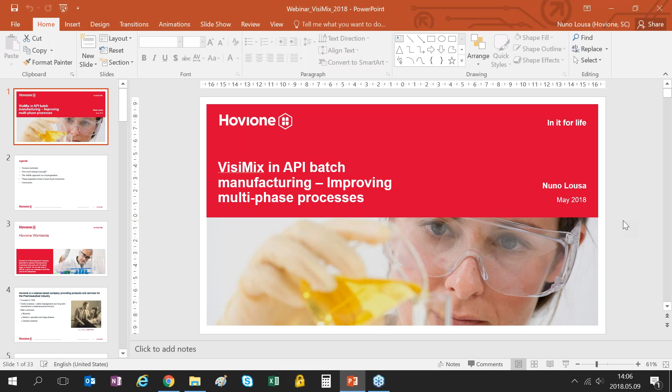So let's go over the agenda for this presentation. I will start off by speaking a bit about Hovione - who are we, for those who don't know us. I will also discuss briefly the importance of mixing simulations in our business, namely its importance due to the subjective nature of mixing. Then the peak of the presentation will be a couple of case studies regarding a hydrogenation reaction and the optimization of a liquid-liquid extraction. And I will end with a few conclusions regarding the benefits of using this mixing simulation tool.

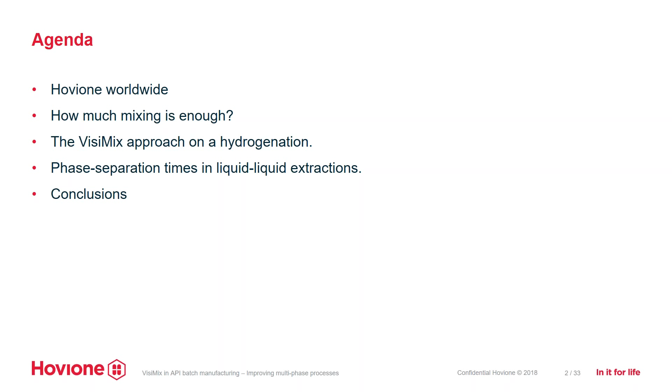So Hovione, who are we? We are a pharmaceutical company dedicated to helping pharmaceutical customers bring new and off-patent drugs to market. We usually say that we achieve the impossible. We can do what is difficult, and we give our customers what they cannot find elsewhere.

So our history began almost 60 years ago. This is our founder, Ivan Villax. We are a family business, which enables us to have stable management and long-term commitment to our customers, which are mainly biotechs, medium specialty and large pharma, but also some generic pharmaceutical companies as well.

The past has been very good for us, but the future is expected to be even brighter. We started off by developing several patents in corticosteroids and semi-synthetic tetracyclines in the 60s and 70s. Later, in the 90s, we started having particle engineering capabilities, which make us now one of the top players in the world regarding spray drying and other particle engineering technologies.

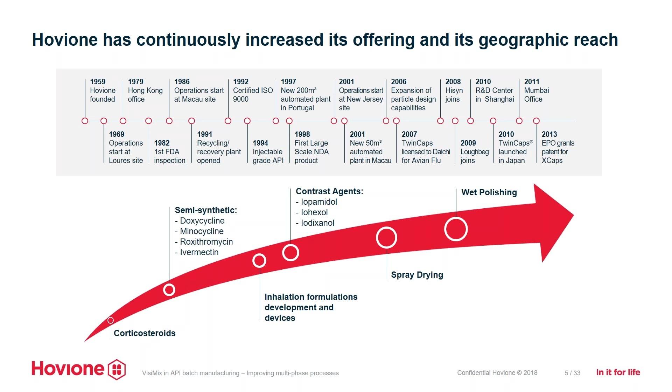We are based almost worldwide. We have a very nice site, and the most important one is in Loures, Portugal, where I'm broadcasting this presentation. We have a state-of-the-art R&D center in Lisbon, and our plant in Loures. But also in the United States, we have very nice pilot plant facilities and research and development labs. We have in Cork huge manufacturing capabilities, which were acquired from Pfizer almost 10 years ago, but also a very important production unit in Macau, China.

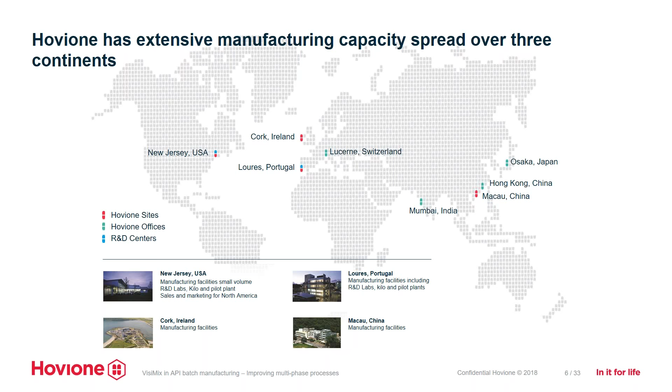So let's begin. Why do I think about mixing? When do we consider that mixing is enough? This is a very interesting question because, as you'll be able to see, many times we are asked to quantify mixing and to determine scale-up factors, by our customers, but also by my chemist colleagues and my colleagues from engineering and manufacturing.

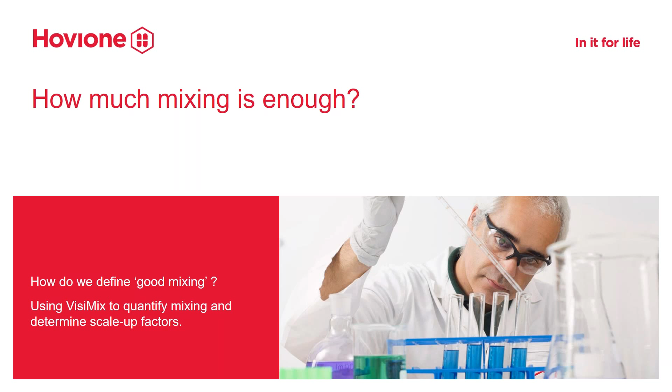Some of the questions I came across - I once was in a teleconference where a customer asked for efficient mixing at this stage, but we didn't have any indication of what could be good mixing, because we didn't know what reactor we were going to use, or the impeller type, or even simple RPMs in the lab. We had no idea. But he mentioned that it would be important. So this tool allows us to quantify this sort of efficient mixing, which is very important.

Also, mixing issues when we perform scale-up can destroy a batch - whether it's impurity increase, different crystal polymorphs, or even excessive time during operations - all of this can cost a lot of money. So I strongly advise people to invest in this type of study.

I also get very funny questions from my colleagues at the chemistry department, like, can we avoid wall splashing? This is very important when you're dealing with crystallization by distillation, for example, where you can get the product stuck in the reactor walls. In the lab this is not very hazardous, because it's a very small amount of product, and you can actually see it becoming stuck and try to make it go back to the liquid. But at manufacturing scale, this can be a real problem. So this type of simulation also helps us understand if this can happen.

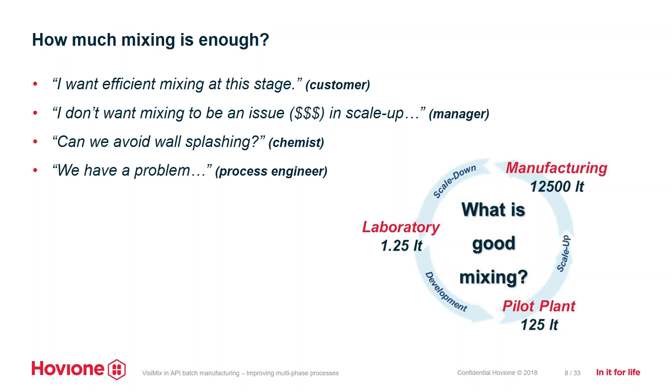In this slide I'm presenting a very basic explanation of how I usually evaluate the mixing properties in a vessel. I think I have the...

Dalia, where can I get the pointer? Okay, no, sorry.

What I do is start off by evaluating, using the VisiMix software, to calculate mixing parameters and mixing properties such as blending time, micromixing, mesomixing, hydrodynamics, flow speed and direction - very important as well - but also energy dissipation. In case of multi-phase dispersions, we also have solids suspension, droplet sizes, and specific area for mass transfer. So very useful parameters that you can then try to modulate by changing your stirring speed or your batch size.

This includes batch size at manufacturing. Sometimes I can actually tell the process engineer that it's better to do two batches instead of one, if I found that the mixing parameter can have a great influence on the process.

Also, by changing the impeller or the baffle type, we can also try to force the process to have the parameters that we know are important. I've also come across situations where I had to select specific reagent inlet positions, for instance in areas of maximum energy dissipation, in order to maximize the mass transfer for the process.

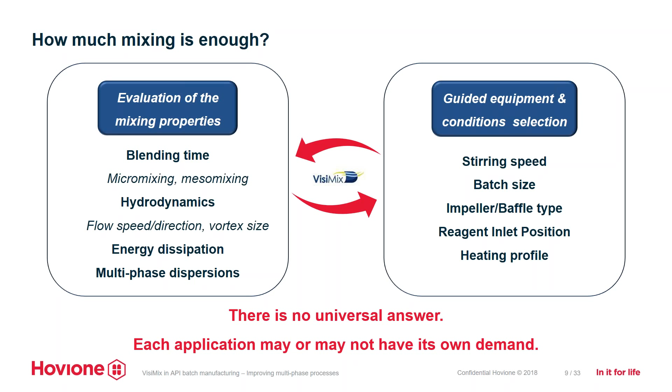Okay, so there's just a small glimpse here. There's no universal answer for how much mixing is enough. You always need to study your process in the lab, or at least gather some observations at manufacturing, so that you're able to scale down the process and perform troubleshooting. I usually do this in the lab because it's less expensive. Anyway, each application may or may not have its own mixing demand.

Which is very nice as well - it helps us a lot in getting the right-first-time approach. Between Hovione sites, I've come across problems in emulsion formation, crystallizations, and heat transfer, as I was saying. I've also had the opportunity to study hydrogenations, which you will see today.

And of course the mechanical design, because when we want a new impeller, we actually ask the suppliers for specific characteristics of that impeller. We don't ask the supplier to help us choose the best impeller - we do pretty much the opposite. We present the supplier with the impeller we want.

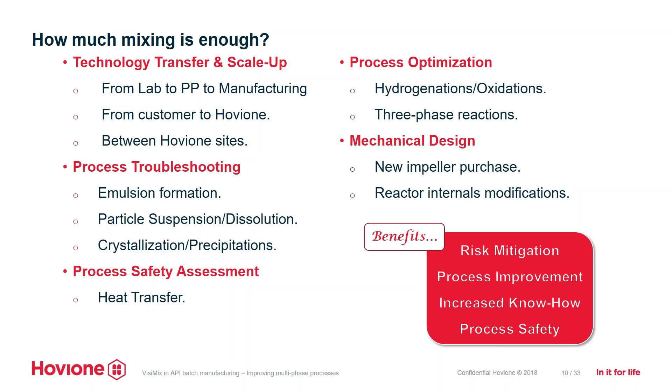All in all, this provides very nice benefits, such as risk mitigation for batch failure - this is the main benefit I get from using the software - but also process improvement, increased know-how, because you'll understand your processes better, and of course, as I said before, process safety.

We will then see a case study regarding hydrogenation and a case study regarding liquid-liquid extraction. As for the hydrogenation, the goal here was to perform a tech transfer, which turned out to be a success. But during that tech transfer, I came across several observations which enabled me to optimize our process by improving the impurity profile and cycle time.

Okay, so let me show you how it all happened. This started off by the need to increase production throughput, and so we had to replicate a process that was going on in our site. It usually used a 3,000 liter hydrogenator, and now we also had to use a 6,000 liter hydrogenator.

This happened a long time ago, and no one really knows how the new stirring speed, the 164 RPM, was selected, because we asked the manufacturer of this reactor to design the impeller in order to replicate the mixing conditions observed in the first reactor, at the first site.

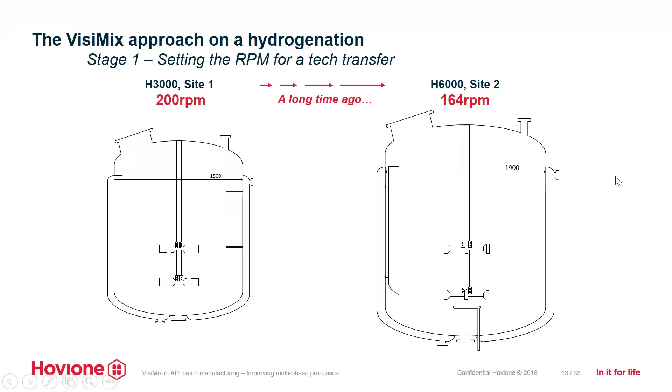The fact was that the process went on very smoothly, and now I had the challenge to transfer again this process, but this time it was for a 5,000 liter hydrogenator.

The hydrogenator had several particularities, namely the three-stage impeller system, whereas the previous two hydrogenators only had two impeller stages, and it also had a higher height to diameter ratio, so it was like a cigar, as we usually call it. Anyway, so how did I approach this issue?

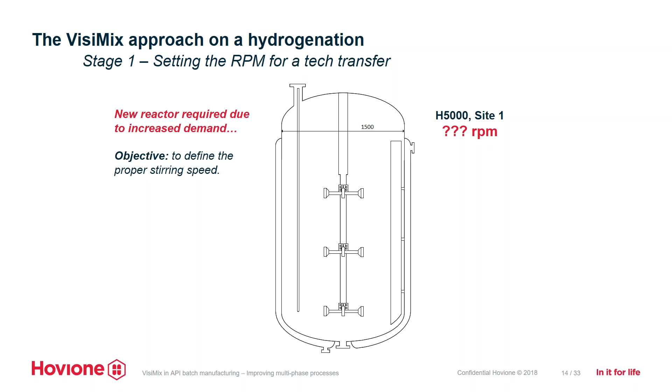I started off by simulating both reactors, the initial ones, the 3,000 liter and the 6,000 liter hydrogenator, and I found that they had exactly the same maximum energy dissipation profile. So it was pretty clear to me, pretty obvious, that the manufacturer also used this approach in order to simulate the mixing conditions that would return the process output.

The fact is that the reaction output in both of these reactors was very similar, so in terms of reaction time and impurity profile, everything was very, very alike. So I concluded that probably we would also use this approach in order to select the adequate RPMs in the 5,000 liter reactor.

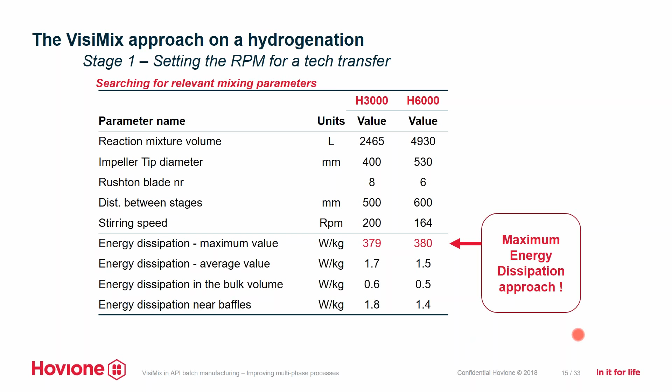In fact, when we used these new RPMs, which were 158 for the new hydrogenator, the performance of the process was outstanding. It actually cut the reaction time almost to half, and we obtained the lowest values of impurities ever.

After discussing these observations with our process chemists, we quickly understood that this was due to a faster reaction, because one of the impurities was correlated with long reaction times. So it was pretty obvious that the increase in mass transfer was taking place. But since we were mimicking the exact same energy dissipation conditions, something was missing from here.

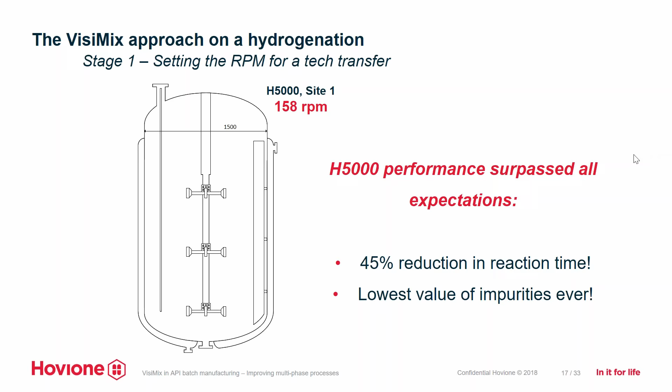So I went on to the software again. I did some more simulations, but this time I evaluated the gas-liquid parameters. As you can see, in the previous reactors, they were all about the same order of magnitude, namely the estimated surface aeration rate, and for instance, this one I like very much, the specific mass transfer area. So they're pretty much the same order of magnitude, okay?

But when we move to the new reactor, we jumped one order of magnitude. So in fact, the new hydrogenator, the 5,000 liter hydrogenator, had a much higher ability to improve the mass transfer for this process, which will explain why we are observing such a fast reaction and low impurity profiles.

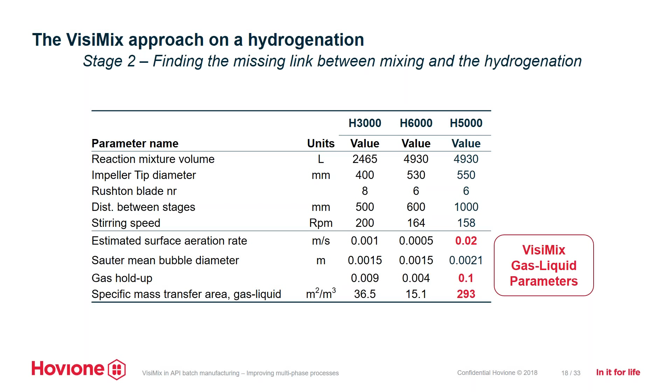So the question was now, can I do this for the other reactors? Can I try to improve this process in the other hydrogenators? I had to back up a bit on this. I had to find a rationale for this, because I was about to suggest changes to a process that was already validated and approved by the FDA and so on.

So you can find a lot of references in the literature that correlate a high KLA, a mass transfer coefficient, with hydrogenation reactions. So it was pretty easy.

But also the VisiMix allows us to check, to visualize the flow pattern inside the hydrogenator. And what you can see here is a clear compartmentalization caused by the 3 different impeller stages. So this type of impeller, a Rushton turbine, can create, when used in more than one stage, this type of compartmentalization effect.

And if you insert the hydrogen from the bottom, this will take longer time to leave the reactor, because the flow is actually pushing it down, thus fighting a bit its buoyancy. Okay, you can also find a lot of reports such as this one in the literature.

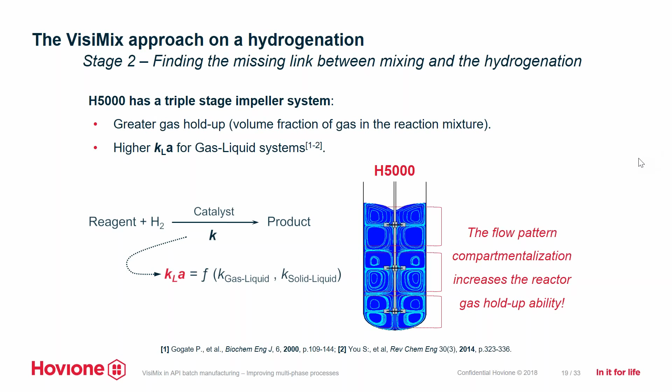So I thought this could be a nice approach, and I did a lot of simulations in the 6,000 liter hydrogenator, the one that actually was used very often. I did a lot of simulations. You can only see one, just by adding an extra impeller stage.

Although our energy dissipation profile, the maximum energy dissipation profile, would be slightly lower than the previous reactor, the gas-liquid properties would increase one order of magnitude, which was actually what happened in the 5,000 liter reactor, which yielded a very nice reaction. So, a very simple way to optimize the process, just by inserting a new impeller stage.

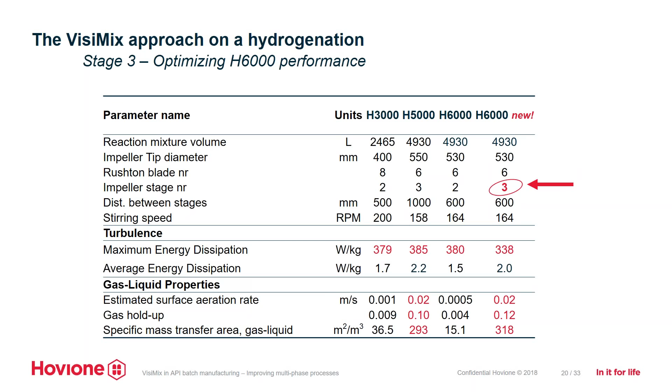But this had some engineering concerns, of course, but the software also allows us to do this type of simulations. You can actually check what would be the impact on the stability of your shaft and on the power output that it will now take from your engine, your motor.

And what you can see is that, I remember the motor had something like 22 kilowatts of power, so we were way below - we had enough power to accommodate the new impeller stage.

We are also very happy with the critical frequency. This is very important, especially in hydrogenators. For those of you with experience on this, we cannot have vibrations in the shaft, otherwise we can compromise and have leaks in our hydrogenator, which we don't want for safety reasons, of course.

Anyway, I used these values and presented them to our engineering department, who were very happy. They went on to search for the new impeller stage, and they actually got it installed.

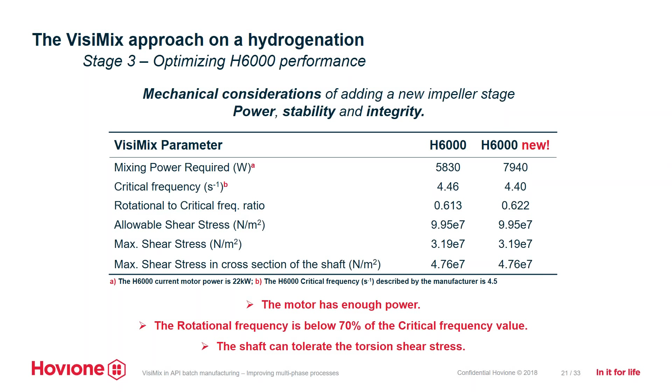We were able to not only perform this successful tech transfer from the 6,000 liter reactor to the 5,000 liter, but then, after gaining more knowledge about the process, we were able to improve the process in the 6,000 liter reactor, generating fewer impurities and decreasing the reaction time, which actually increased the manufacturing turnover. That was amazing, a very important achievement.

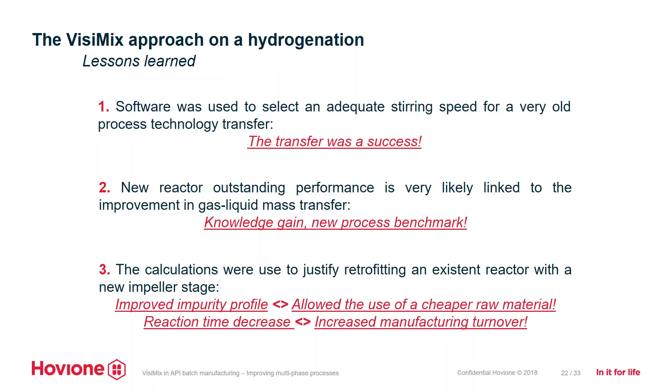So I hope this first part was clear. I will now present some of the work I have developed using liquid extractions.

This was a bit more complex, because at the beginning I had to find a very nice rationale to apply this software in modeling this type of process. Because liquid extraction itself is very complex, you have a lot of variables and a lot of mixing parameters which can have influence in this type of process. So it was very important for me to be able to narrow down the mixing parameters and focus only on the most important ones.

My goal was actually to develop a methodology, a transversal methodology, that could be used in all liquid-liquid extractions performed at Hovione. I will show you how.

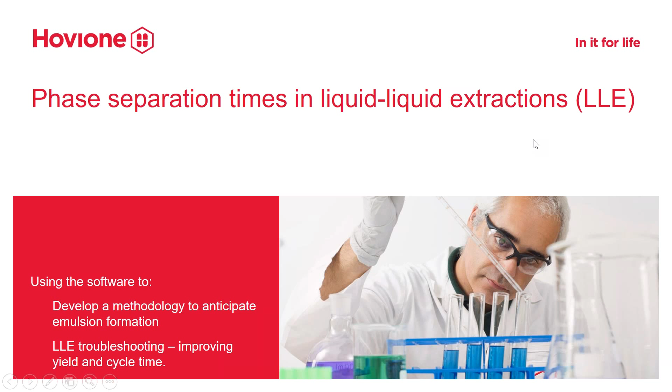Some of the background might be important for those who aren't familiar. Bear in mind that for me it's very important not to have an emulsion. In some pharmaceutical industries, when we make foams and creams, we want emulsions, stable and homogeneous emulsions. But when we talk about liquid-liquid extractions, mainly used for quench and workup in chemical synthesis, we don't want emulsions to form.

We want a good extraction to take place and very fast layer separation so we can move on with our process. Sometimes we use so much mixing intensity that we then have to wait a lot for the phases to separate, which can impact planning and sometimes batch quality. So we really want to avoid that. We don't want that to happen.

In liquid-liquid extraction, we usually have two immiscible liquids. One we call the disperse phase, which forms drops in a matrix or continuous phase.

The main impact of mixing is on the equilibrium established between drop coalescence and drop breakup. Drop breakup mainly happens in areas of the vessel with high turbulence and high energy dissipation, near the impeller and near the baffles. Drop coalescence mainly happens in the bulk of the vessel or at the top, basically in the opposite areas where we have low energy dissipation.

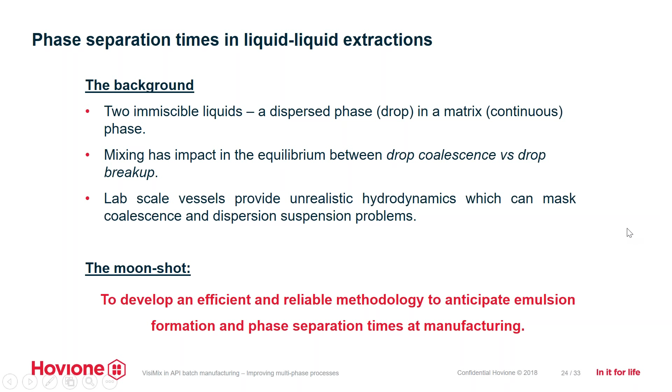So as I said before, my goal was to develop an efficient and reliable methodology to anticipate emulsion formation and to predict the phase separation time at manufacturing. Quite a moonshot. Anyway, how did I do this?

I started off by doing a lot of literature research. There are some nice publications in this field, and also a very interesting book, the Handbook of Industrial Mixing. I recommend that too, if you're trying to get into the mixing world now, you should read the book. VisiMix also has a very nice help file, which actually pinpoints some of the main mixing parameters that are important for this type of process.

I really wanted to narrow it down to just 2 or 3 mixing parameters so that I could perform a successful scale down of my operations, because you will not be able to mimic all the mixing parameters you can calculate. You have to make a choice, and sometimes you won't be able to do enough laboratory experiments to quantify the importance of different mixing parameters. So I had to do this initial screening to find the real important mixing parameters so I could apply it to process troubleshooting and scale up.

Some of the parameters more related with liquid-liquid extraction will be the mean drop size, because it regulates the smaller the drops, the easier it is to form an emulsion. Turbulence shear rate at the blade and maximum energy dissipation will also have a lot of influence on drop size. Circulation flow rate is also very important because if you have a high shear area inside the reactor, you'll need to recirculate the mixture through that area in order to create the drops.

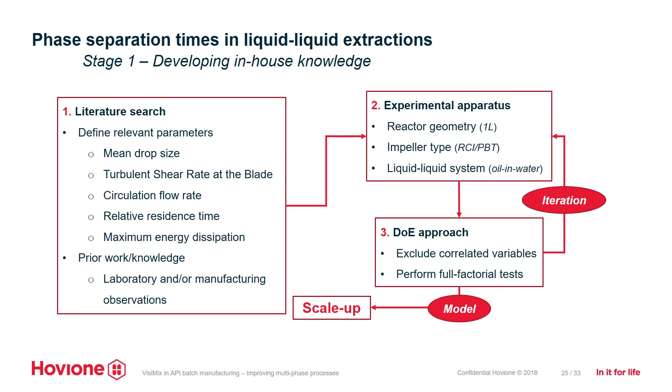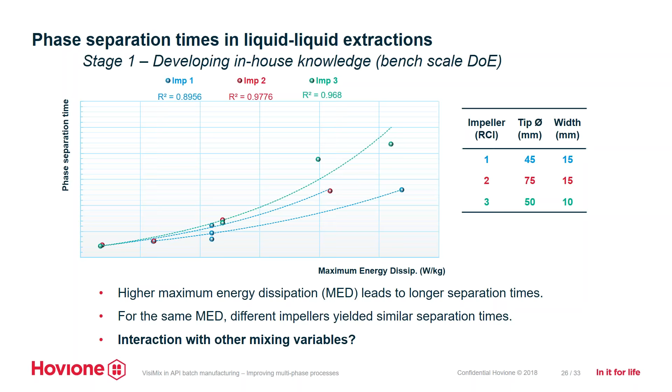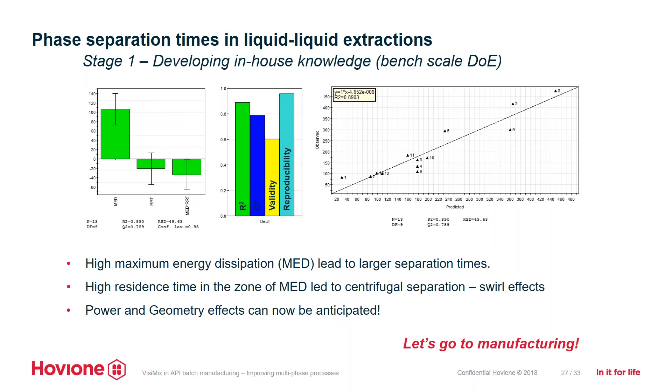In this slide, I am showing you real data from a process that I scaled down to the lab. This was an ongoing process at the manufacturing site, and what you can see is...

The initial mixing conditions observed at manufacturing will always generate a small emulsion. This emulsion contained a lot of impurities and had to be discarded. It equates to approximately 40 kilograms of reaction mass, and if you work in this business, you know how much 1 kilogram of API is worth. So we were losing a lot of money because we didn't want to compromise the quality of the product. We had to discard this emulsion since it contained a high amount of impurities.

However, in the lab, just by tuning the mixing intensity of this extraction, I was able to perform it without emulsion formation, or with very low amounts of emulsion. I call these the optimized mixing conditions. My goal was then to mimic these conditions at manufacturing in order to reduce the amount of emulsion we were forming.

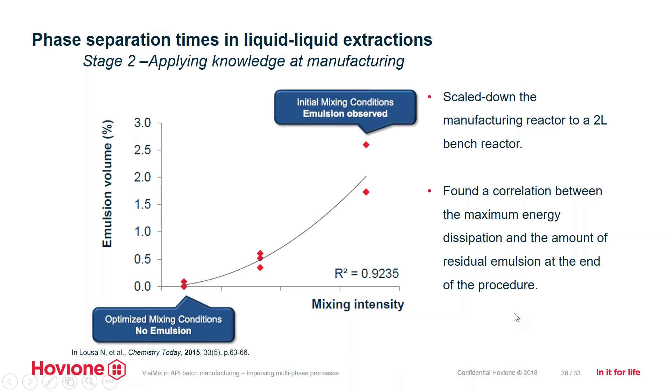But when we deal with liquid-liquid extractions, if you don't mix enough, it can actually influence the outcome of the extraction, because you need mixing to extract. So if you reduce the mixing, you may not be able to get your specification.

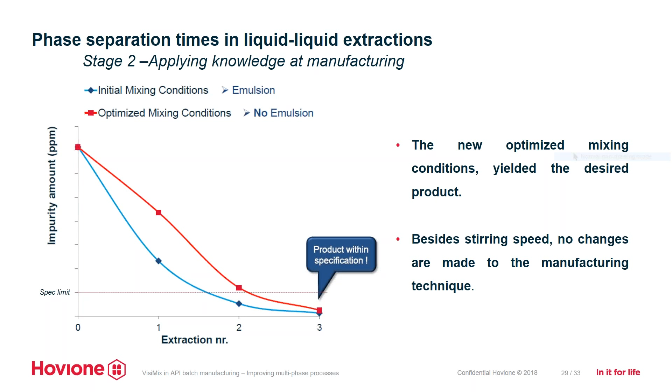So we were able to improve the yield of this process, which is a very, very impressive result as well.

To conclude, what were the lessons learned? Very important were the key mixing parameters identified at the early stage of this development. I found that the maximum energy dissipation and the relative residence time in the zone of maximum energy dissipation were in fact the most important mixing parameters in the liquid-liquid extractions I studied.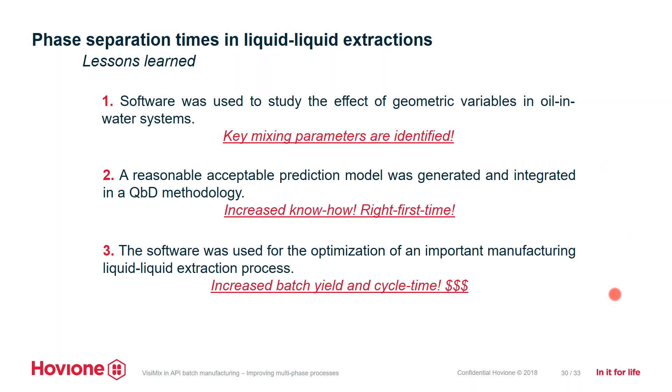I also increased my know-how, because I'm now applying this model to all the liquid-liquid extractions I find at Hovione. But of course, what you probably want to hear most is that I was able to improve batch yield and cycle time, because we had to wait a bit longer to separate that small emulsion that was formed, and now I have no emulsion, so I could move forward with my process.

To conclude, it's just to highlight the main benefits that can come from using this software.

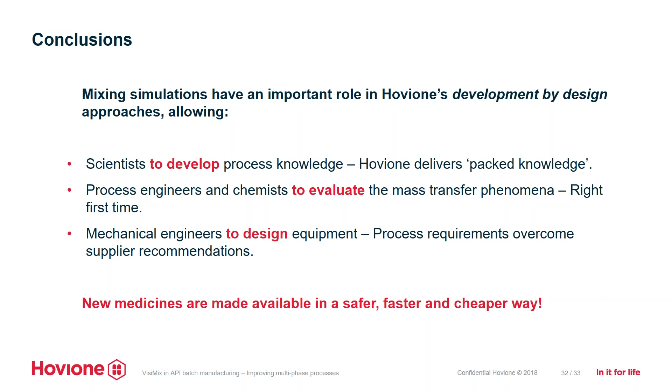I would like to thank you very much for your attention, but also I need to acknowledge my line manager, Carlos Alvarez, who was a pioneer in the use of this software, and also the process engineers involved in the processes I've shown you, Pedro Santos and Hélio Lourenço, and also Luis Olival from the engineering department, who handled improving and inserting a new impeller in the 6,000 liter reactor.

I enjoyed a lot about your connections between the process and the requirements you need to answer to the company. I think it was very good, very well exposed to everyone. We have some questions here.